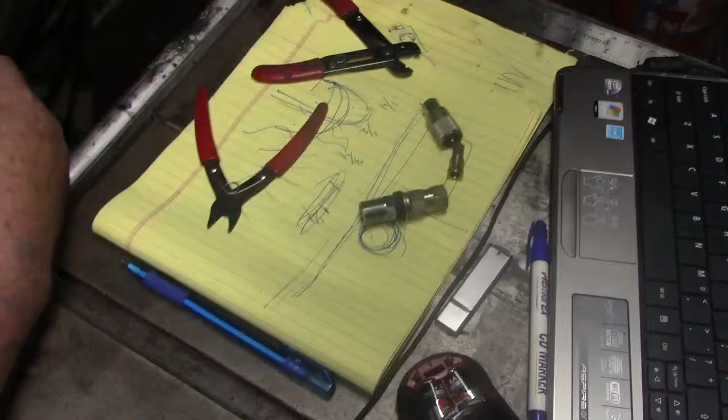Alright, let's talk a little bit about the mount.

Oh, wait a minute, let me get some wire too. Hold on a minute, guys.

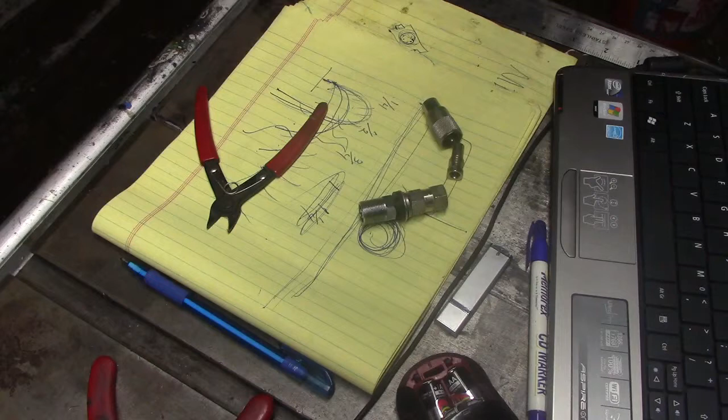This is also a no-no, by the way. Zigzag is okay, but tying it to hold itself, you don't want to do that. Put a couple wire ties. Tie it loosely, not real tight, loose, you know, but yet tight enough to hold it, and you're okay.

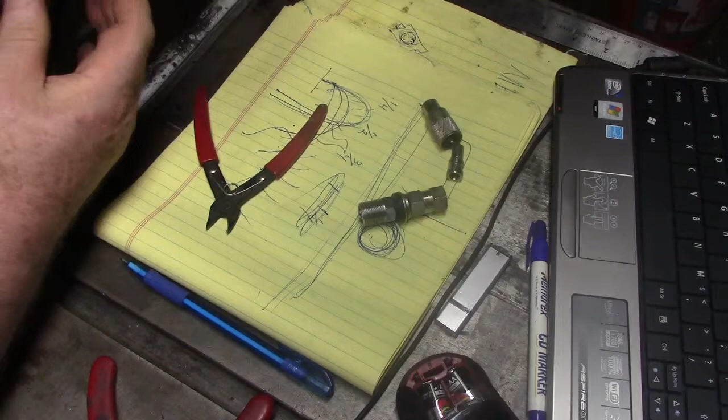Now there's two different types of coax, and there's a number of different types of mounts. Well, there's a number of different types of coax too, but you're going to see basically two types that are most popular and commonly used.

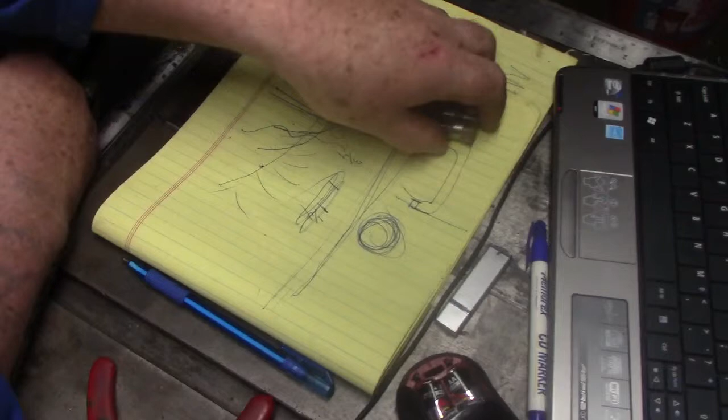Excuse me, guys. Let's get a new page.

Start with a mount. This is what they call a stud mount. Most of your mounts, even though it may not look like this, the principle is the same. I've got a few more mounts laying around here. I'll pull a few out and show you. Now, how this works is, this was like the one I just put on my van. Well, real close to it.

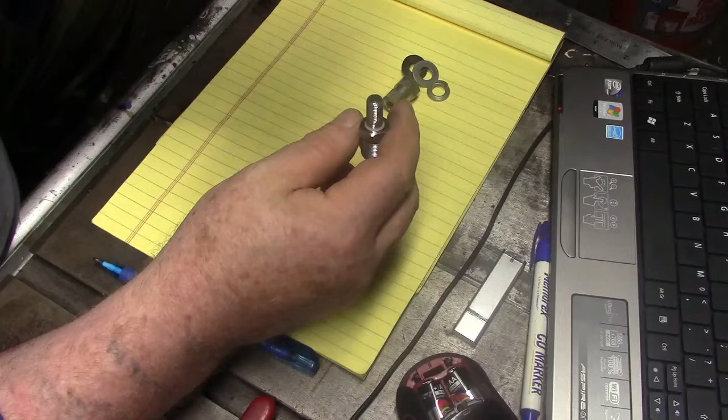The one on my van had an Allen key that fed through up to what they call the 3/8 24 thread. What you would do is you would drill a clean 1/2 inch hole. You can't have any burrs underneath, because if you look at this, you'll see that little ring. If I can find it. See that little white ring? Come on, here we go. That little white ring

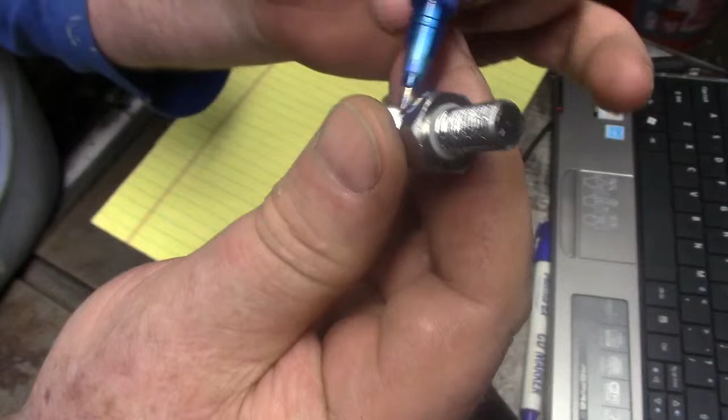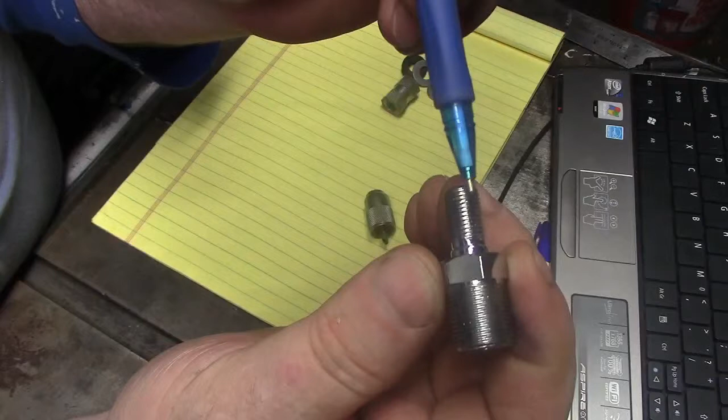right there is a nylon ring that's isolating this stud from this part here. This part here is the ground. This part here is the part that's going to end up touching metal someplace. This part here is where the ground side of the PL259 connector is going to connect to. The center part is where the center of the PL259 is going to connect to. So this center here, this 3/8 24 thread, is actually connected to this little piece right here in the center. And that's all separated and isolated by that nylon ring.

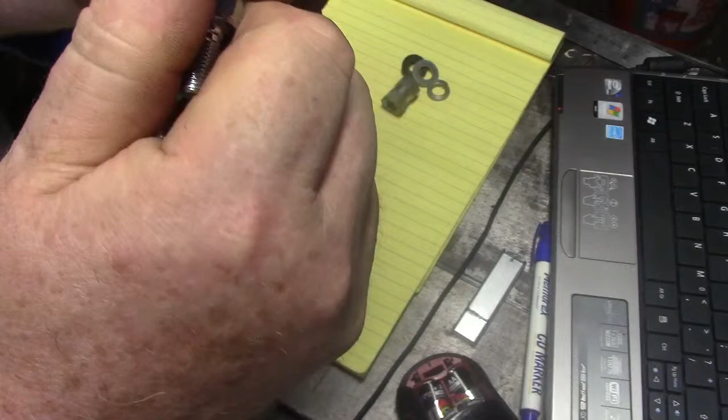So when you plug this in, and we'll get to this in a minute, you're plugging that into the center, which is the hot, because it's isolated, and this here is your ground, which is going to follow the ground on the coax all the way up to the back of the radio, and it's going to be grounded to the back of the radio, which also, most of the time, isolates through the ground that you connect your hot and ground to. Now sometimes the boards are isolated up there, so we're not going to get into that too much.

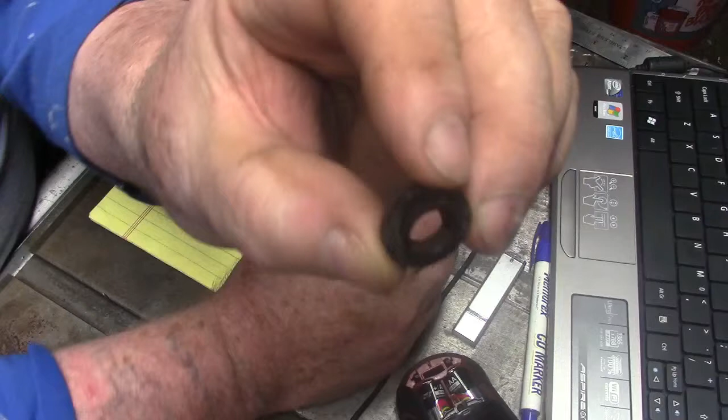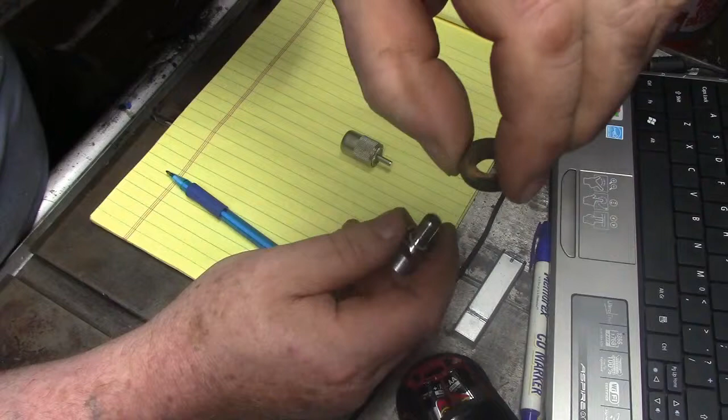Now, so you take your 1/2 inch hole. Your 1/2 inch hole is the size of that little ring, that collar that we're seeing in there. I got to keep looking at this camera so it doesn't fog up. That little collar. Once you drill your 1/2 inch hole, this snaps down on the top into that 1/2 inch hole. This slides up into the 1/2 inch hole. That collar is touching that isolator right there, which is keeping this from touching or moving around in that 1/2 inch hole and shorting out.

Then you put your washer and lock washer on, and you screw this down, you snug it up nice and tight. Don't go totally nuts with it, because if you go too tight, you're actually going to start lifting this stud mount out, and that'll start pulling out, and you're actually wrecking a connector. But you want to make it tight, so tighten it. But you know, don't use a 3-foot wrench. So that's how that all works.

Now, most of your parts and your antennas and your kits, you're going to notice that if it's got a stud on it or not, this principle is the same. Okay, let's put it that way. So let me put this back together. Washer, lock washer, and then actually the stud, which is a 3/8 24 thread, because most of your antennas, your fiberglass antennas or your stainless steels and stuff like that, are going to have the 3/8 24 thread.

Now we have our PL259 connector.

What's up, guys? Oh yeah, you see a little puppy? Yeah.

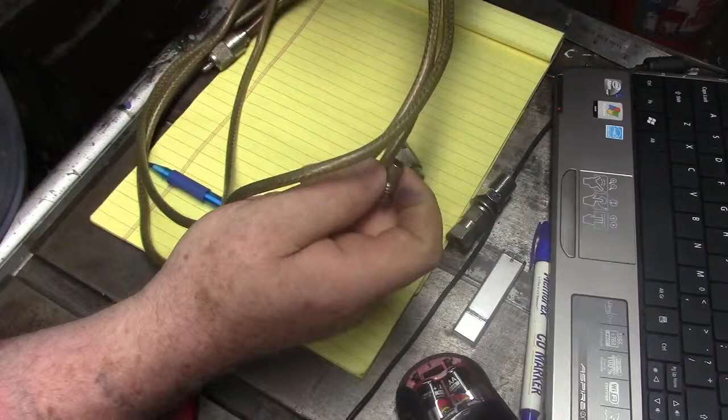PL259. Then we have a reducer. This is a 176 reducer. A 176 reducer is made to fit the 8X wire. Now don't go by the color. This is a clear with a copper braid, 97% shield by the way, and it's got a heavy stranded center, which is your hot again.

I'm going to say hot and ground a lot, but I don't mean like 12-volt hot and ground. You know, if you touch these two together, you're not going to get a spark. Unless you're keying down on the microphone, then you will blow the output transistor.

And if you put a little neon bulb, sometimes you can even light a bulb. But this is what they call 8X. It's got a good shield, it's got a good center conductor, and everything is fine. I don't care for solid copper conductors in the center of small coax, because the center conductor, if it's solid, sometimes is just too thin, and if the coax starts to get bent around a lot, it's a possibility that it's going to break off. You want stranded, all right? And the more strands, the better. That's why the 8X comes in handy.

This is standard coax. This is coax that normally comes with kits, you know, antennas that are all together. Everything comes in one little package. Now this actually is off of a Wilson 1000. So this is not bad wire, even though it's smaller. However, this has got a solid strand in the center, which I don't care for. Solid piece, not stranded. But for the Wilson antenna, this works perfectly because it was designed around it.

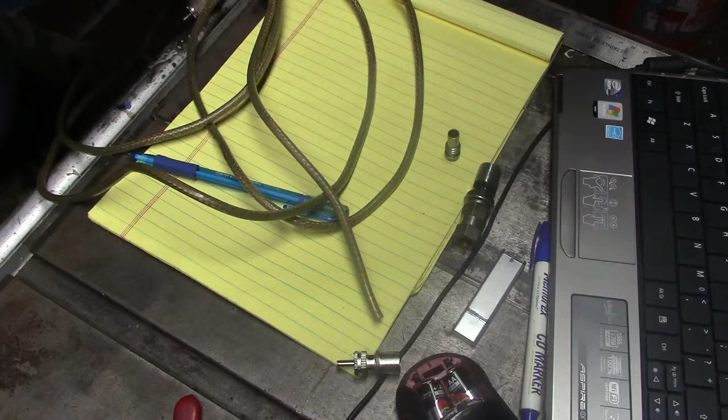If you can see those little holes in there, you're going to see the copper shielding inside that little hole. I don't know if you can see the black going in there. And you're going to be able to solder it from in here if you wanted to. Now, because it's threaded on, you don't have to, but it's a good idea to do, as long as you're familiar with soldering. You don't want to heat it up so much that you end up melting through the insulator, because the antenna wire also has an insulator on it. That little nylon piece that you've seen in the mount, well, it's a little bit different on the wire, but there is one.

So, again, with this being together, this is made to take the heavier wire. Well, by putting this in there, it's now made to take the smaller wire. If I put a 175 reducer on there, it would take the smaller wire yet. All right. Now, there's all different types, and there are different colors. There's blue, there's white, there's black, there's clear. There's clear with a copper braid. There's clear with a silver braid. There's different types. Some like some more over the others.

But basically, if it's RG8X or RG8 or Super Coax, there's all different names for it, it's okay, because it's got a good shield on it. Some shields are only like 84%, 76%, 90%, 92%. Most of your 8X stuff is 97%, so that helps a lot. Now where that comes in handy is, on the heavier shield, I'm going to explain it to you like a garden hose.

Now I'm trying to explain all this in a simple way so that the non-experienced can kind of understand what I'm talking about. And that goes for when I was showing you where to put the coax, where not to put it, how it works, the wavelength. When I talked about all that, I try to do it in simple form. Is that the technical terms for everything? No. I don't want to lose anybody. I want to make it so you kind of understand.

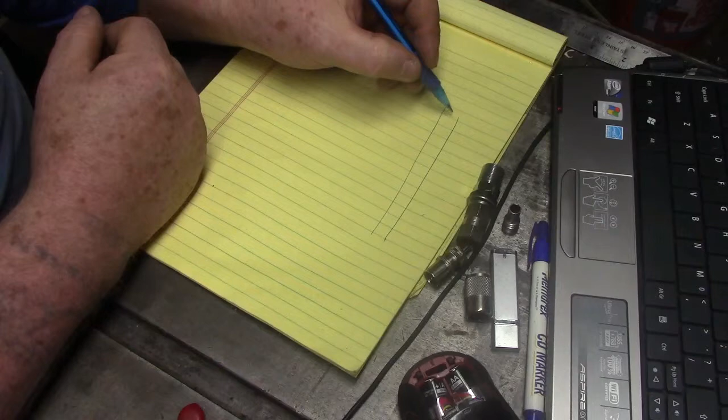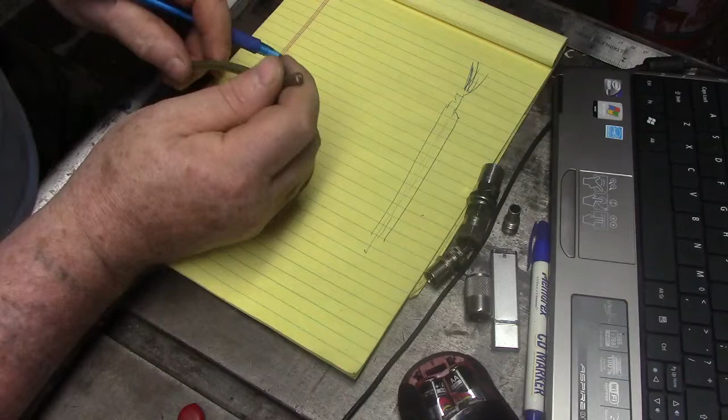Now the coax. Picture the coax being a hose. You got your garden hose, got a little nozzle on the front. We got water flowing through there. We turn the nozzle on, we got great pressure. Well, the nozzle and the water is the center of the coax. That's where your signal is actually traveling. Again, I'm using simple terms.

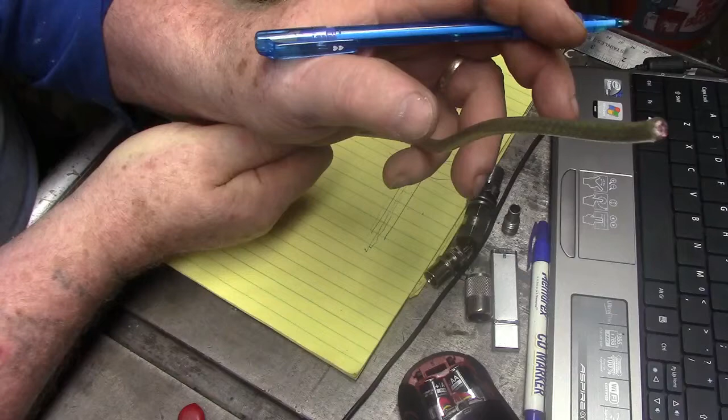The ground is holding that signal in so it doesn't leak out. If I was to take this hose and start putting holes in it, we're going to have water squirting out. Well, the lesser the ground, the shielding, for instance, we'll say 84%, 76%, the less percent, the more openings are going to be in it. So the more of this signal, the water that's going out, your 4 watts coming out of the back of your radio, again we're talking legal power now, it's all escaping.

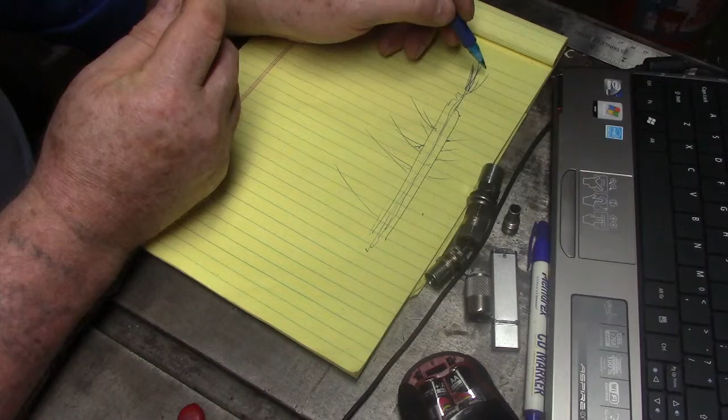So you may not see 4 watts by the time it gets to the end. You're going to see maybe 2 watts, 2.5 watts, 3 watts, and then if you got an SWR issue, that's going to be less yet. So we want to make sure we have a good coax. If you want to do it right, you got to do it right all the way.

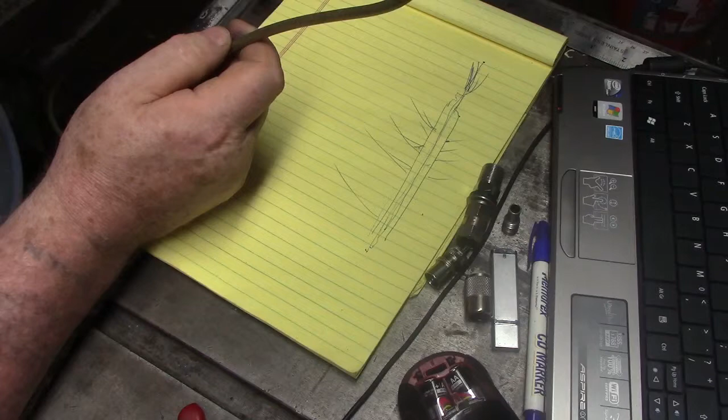If not, buy a kit, because that's going to be your best bet, because at least the kit is kind of put together to work. As long as you buy a decent kit. You start buying cheap stuff, you're going to get cheap, but you don't always have to spend a lot of money either. That's the trick when it comes to a lot of this stuff. Some things you just have to know.

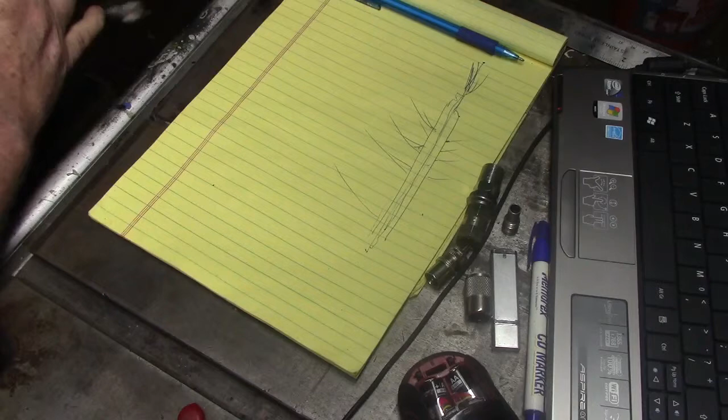K40s are a good antenna. The stainless steel, what they call a base load. Their fiberglass antennas, personally, I think they suck. Wilson 500s, Wilson 1000s, they're good antennas. You buy one of those as a kit, it's going to work fine for you. They're trunk mount or roof mount. If any other kind of mount, you're going to have to kind of modify a mount to make it fit.

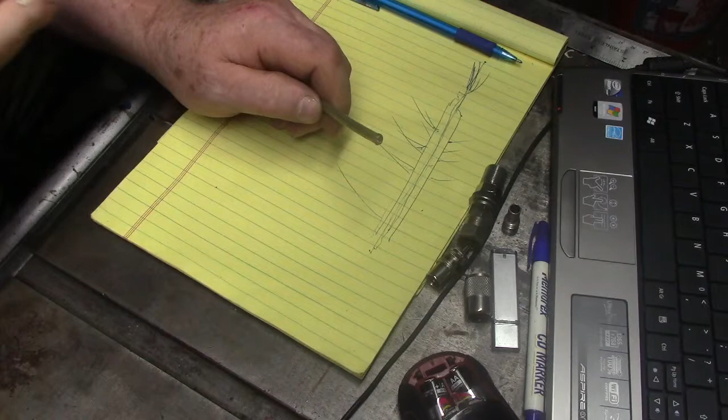You can get magnet mounts. Magnet mounts are great. You can stick it on the roof when you want it, and if it sticks, you know you got a good ground. If it doesn't stick, well, that's fiberglass. It's no good for you. However, you're always dealing with the wire, and the more that wire is exposed, the more problems you can have with it, because there's more chances of it getting damaged. So if the wire is tucked away, buried away, hidden, less chances of it getting damaged.

So let's take this for a minute. Now these strippers are old. I got to buy another half a dozen pair. I haven't bought any strippers in like 4 years. They cost like $1.50 a piece, and I usually buy 5 or 6 pair at a time. But these are tough. These are the only ones I actually use.

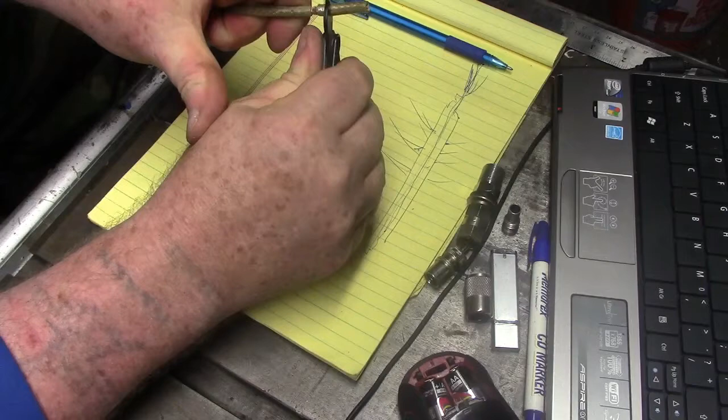I don't like those automatic strippers. I don't like those ones with all the different size wires on it. One stripper fits all. Put it in your hand. Keep your finger underneath the back, and that'll kind of work as a stop. You can use your pinky if you want, so you can use it to adjust where you need it. After you do a few, you find your sweet spots, you'll know just what you need. Anyway, here's the inside, here's the shield.

Now if I wanted to put this into this piece of coax, I would first put the collar on. Again, we don't want to have to worry about that. Then this is going to end up in the picture. So I'm going to put that there someplace, and I'm going to figure from there to the thread about a half inch. I'm going to cut right about a half inch. Now again, these strippers have had it. I've been using them for more than just stripping wire, so this isn't going to be a clean cut at this point, as you can see.

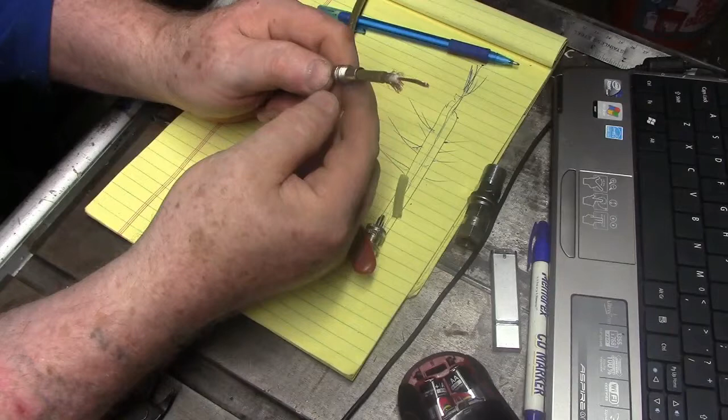Let me take the little stray hairs and trim it up. Do a little barber work here. There we go. So now you can do this two ways using this reducer. I can either put it here, fold this down over the reducer, strip this a little bit more. I always leave a little bit right there.

And what I like to do, you don't have to, because again, I don't want the hot to take any chances of hitting the ground. I usually cut just a little piece off right here, off the casing I just took, and I'll slide that down over that. So now there's no chance of anything happening there. So now I got that.

I would normally now at this point tin this with some solder, and I can take this, feed it through. Come on, let's not get cuckoo here. Feed it through, push it down and thread it on.

Once I thread it on, that hole that was in there that I told you about, where are we? All right, now I see that copper shielding, so I can now solder that and solder this. I want to make sure that this gets warm, and I want to keep the tip a little warm because I want the solder to flow. And so if I keep the solder iron going on the tip, it will suck in.

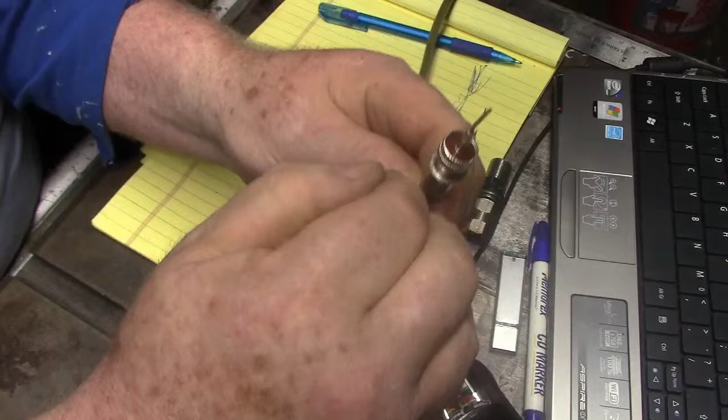Now again, we don't want to start sucking a lot in. We don't want to hold it up right when we do this, because then the solder is going to drip down, start melting all that shit together. We want to keep it on an angle and draw it in with the soldering iron. Get a nice little ball on it. Cut this off even, all right, and so you'll be all set. Solder that. Once you're done, you can just put the collar back on. Now, that's one way.

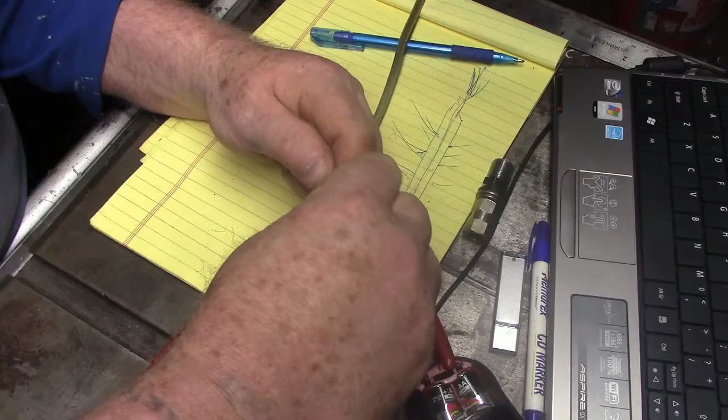If you don't want to solder the shield, you can cheat. It works, but you just have to be careful. How you would do that is we take the shield that we were talking about, and instead of putting it over the collar, we put it under the collar. Hey, Bear. Now this will make the collar a little bit harder to get on, because we've got to bring it down over that shield. So you got to kind of thread it down. Okay. So now the shield is under this, which means it's grounded, because this is actually part of the ground.

When I screw this back into here, get that one little strand, it's going to drive me nuts. When I screw this back down in here like this, I want to make sure that's tight, because this is going to be touching the ground on the radio. The center, again, is isolated by that nylon. So I want to make sure that that reducer is tight, because the shield is touching the reducer. So that's all part of the ground. Then the sleeve's going to go over all that, and then it's going to plug into the back of the radio and screw on the back of the radio, and that's how that works. Okay, so you kind of follow me so far?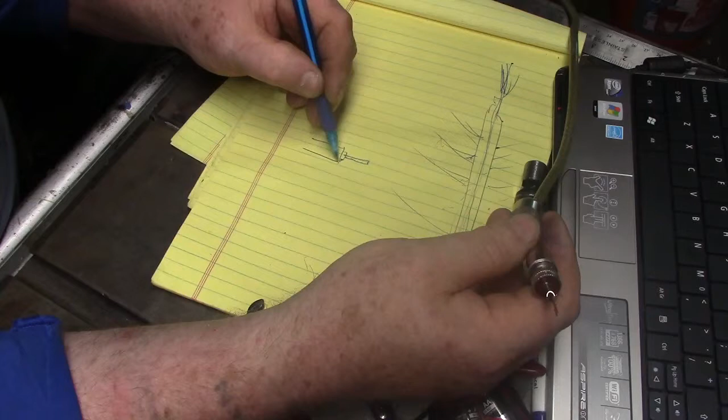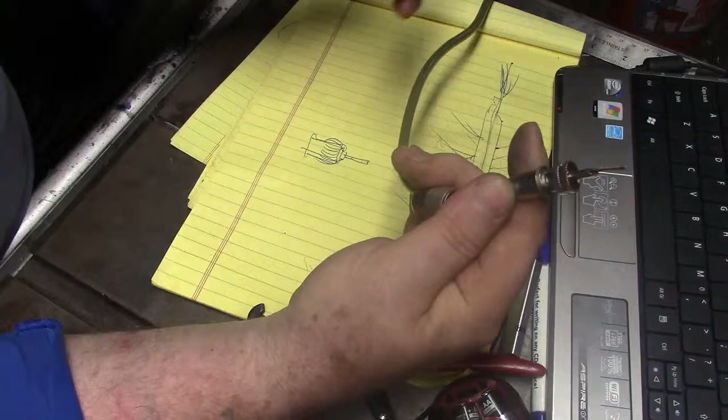Now, the only problem with doing it this way is that the only thing that's holding this wire in place is the soldering of the tip, because the shield is not coming over and caught in between here and the reducer. So let me show you on paper. Here's the coax. We got that little center piece, and then we got our center. This little white piece here is isolating the center from the shield, which is here. Now I can either take the reducer, put it over. Here's my reducer at this point. Take the shield, pull it down, and put it over the reducer. So now when it comes up in here, it's going to come into a little hole on the connector, and then I can solder that when this all goes together.

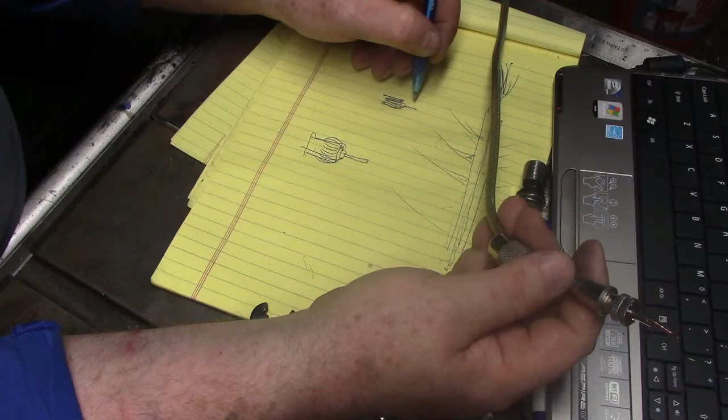Or I could take the coax, the little center wire, take the shield, fold it down right back over itself, over the casing of the wire, take the reducer, slide it down right over all that. You follow me? So now it's all tucked in between the reducer and the coax. You follow me so far? Alright, I'm just going to leave this on here and solder it and leave it like it is. There's no sense me taking this apart because I got a soldering end on it anyway, so I'm just going to leave it like that and back it up just a hair. Alright, oh, I got to tin that first. I got to take it off anyway. Okay. So that's where we're at.

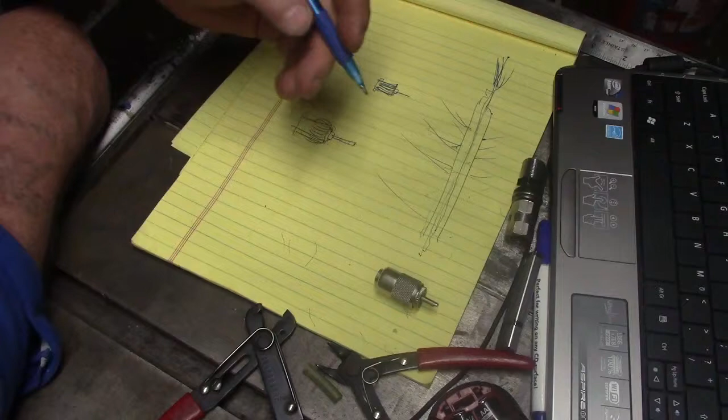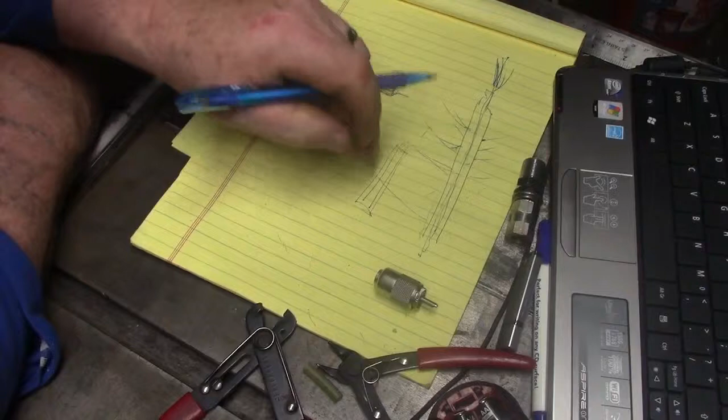So coax means a lot as well. Now for coax, you can get different types of coax. There's RG213, RG214, there's what they call hardline. And when you start getting into your RG213, 214s and stuff like that, it's actually like 100% shield. It's like double shielded in some cases because it's got like an aluminum foil, and then it has the braided shield over that. So you're getting a better wire on some of those things. And then there's what they call hardline. I was telling you earlier, if you start running a house antenna and you run it 200 feet in the air, you're going to lose a lot of signal through your coax.

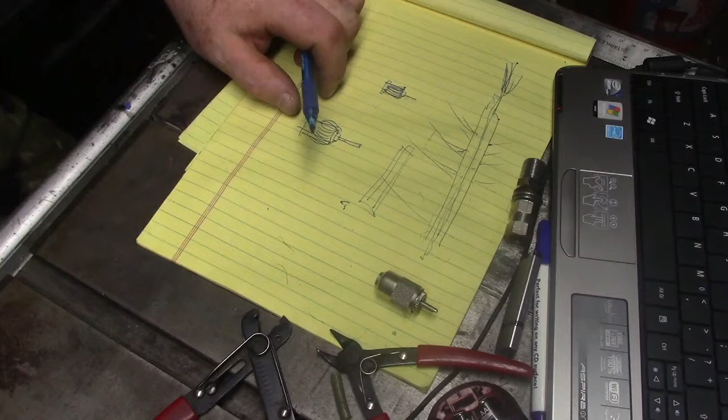Well, with hardline you don't, because hardline is basically like flexible copper tubing injected with foam, with the center conductor, which is also solid, and that is usually about the size of a pencil or about the thickness of this whole casing. Now when it comes to solid center, that's fine because you have enough of it. But hardline is something that not everybody's going to use. They use that a lot on commercial repeaters and things, or if you're going to be running a lot of power. But other than that, 213, 214, you're not going to need any more than that. Actually, you're not going to need any more than your 8X. So, all right. So I hope that helps some of you guys so far.